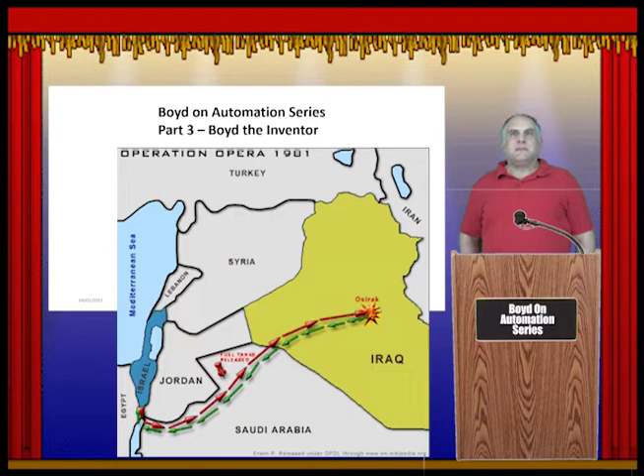The first combat mission of the F-16 was by the Israeli Air Force. It was the only plane in the Israeli Air Force fleet with the range to strike the nuclear plant that Saddam Hussein was building in Iraq. The mission was a success, and Iraq never became a nuclear power.

This certainly helped America's military during both Gulf Wars. The A-10 went on to destroy a majority of the Iraqi tanks in the first Gulf War. The A-10 was the most feared plane by the Iraqis. Not bad for two planes that the generals never wanted.

This presentation is part 3 covering Boyd the Inventor. In Boyd's retirement, he wanted to give further scholarship to air combat. Boyd read a wide variety of books on liberal arts including physics, psychology, anatomy, and philosophy. From his readings and endless conversations with numerous subject matter experts came Boyd's paper called Destruction and Creation and his Patterns of Conflict presentation, where the OODA loop was introduced.

In its simplest form, represented by the picture on the left, is the wheel of observe, orient, decide, and act, or OODA. A more complicated depiction is on the right.

Originally designed for fighter pilots in air combat, Boyd expanded the OODA loop to explain success or failure in most of the major battles in world history. The Blitzkrieg attack of France in 1940 is perhaps a perfect example of OODA applied to armies.

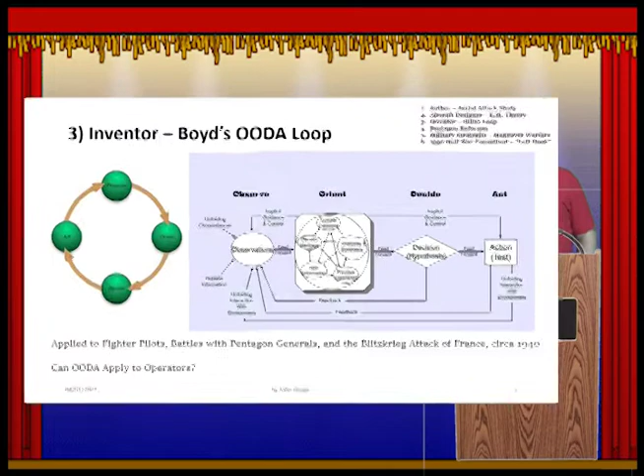Boyd asserts that OODA is essentially the way all humans process their environment. We observe, then orient our observations based on factors such as cultural traditions, previous experience, genetic heritage, and our ability to analyze our observations, then decide on a course of action, and finally act on that decision. We then observe our actions as they impact the environment around us, and the process repeats.

Boyd asserted that the pilot who could run through the OODA cycle fastest would win air combat. In this presentation, we will attempt to answer the question: can OODA apply to process automation in the form of operator performance? Let's investigate OODA a little deeper by defining some terms.

Observe. This is data collection. The worst possible way to observe is to look up values off of graphics and write them down on an operator log sheet. The best possible way to observe is to have the information sorted and prioritized for the operators via the query display, high-performance HMI graphics, alarm management, and trends.

Orient. This is where the observations are analyzed. Training, experience, and aptitude form the basis of the orientation component. A DCS's ability to supply relevant supporting reference information quickly to the operator can also help.

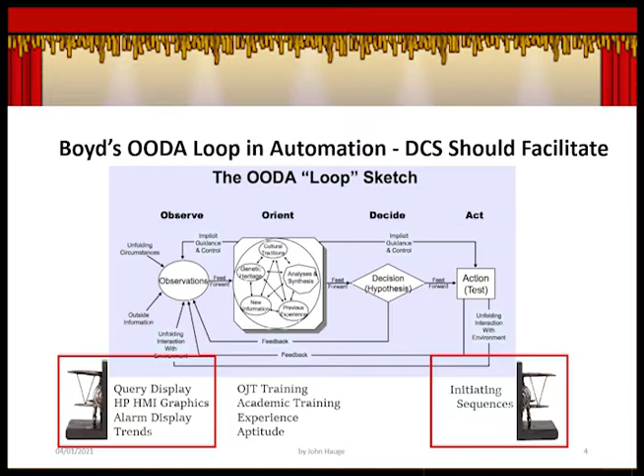The DCS is like bookends of the OODA loop. It should facilitate OODA by providing fast observations and fast actions. The DCS should facilitate an operator's ability to make quick and high-quality decisions and take fast actions.

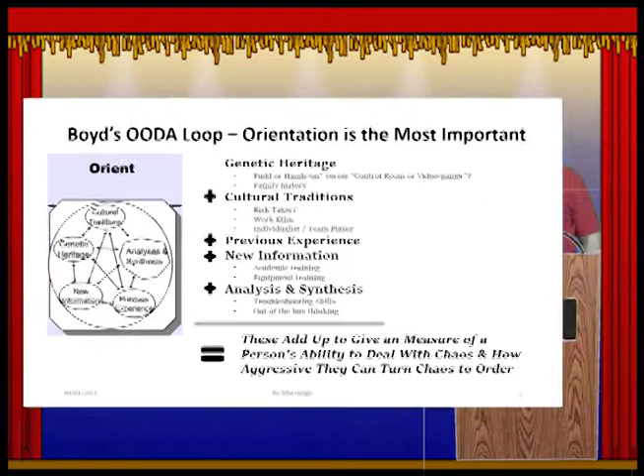Boyd considered orientation as the most important component. Orientation shapes the way a person observes, the way a person decides, and the way a person acts.

Some people prefer to be hands-on rather than work behind a computer screen. Team players may want to collaborate on possible decisions or validate a decision. Some operators may have a personality that make quick decisions come natural. Some operators may have a personality that makes decisions come slower, as they prefer to gather as much information as possible in order to increase their confidence in the final decision. Of these orient factors, training is perhaps the most important method to improve the orientation process.

This would include not just basic information, but also training on various problem-solving methods. Boyd intuitively knew this long before he formalized his OODA ideas. He focused on classroom training while an instructor at Nellis 20 years earlier. It's hard to do justice in 10 minutes to what Boyd could spend 10-some hours explaining after 10 or so years of research.

My impression is that these orient factors can be summed up by one's ability to adapt to chaos and one's aggressiveness in resolving the chaos to return to order. Boyd asserted that in battle, one wants to generate confusion and disorder in the enemy's mind. The enemy's actions will also generate chaos, confusion, and disorder. The aggressive pilot limits the impact of the enemy's actions by quickly countering and staying on offense.

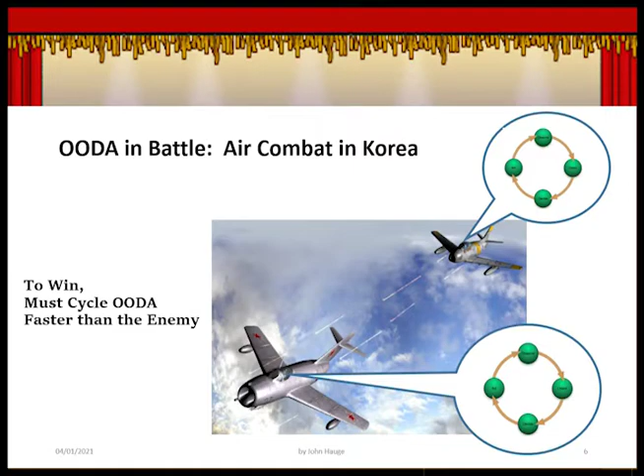To win in air combat, Boyd asserts the pilot must act in a faster tempo than that of the opponent. If successful, the enemy plane will never get an opportunity to fire, and over time will be forced on the defensive. Victory comes when the opponent either gets frustrated and makes a mistake, or starts to panic because they can no longer execute counter moves fast enough.

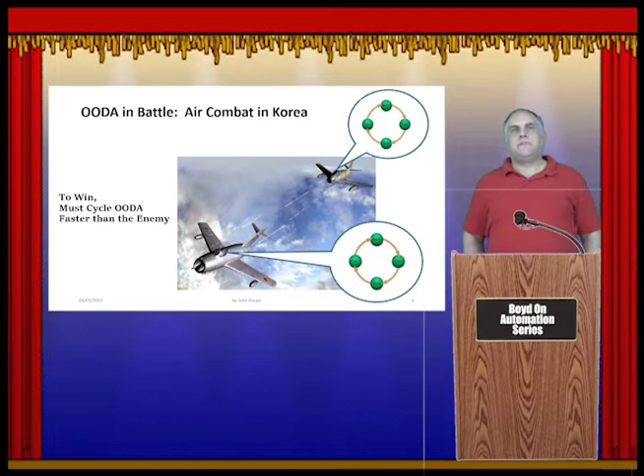In Korea, the F-86 bubble canopy and hydraulic flight controls allowed American pilots to cycle through the OODA loop faster than the MiG pilots. In a dogfight, the F-86 pilot's mind gained order and control with each OODA cycle, while the MiG-15 pilot's mind gained chaos with each OODA cycle, ultimately leading to mental surrender.

In the case of air combat, the fighter pilot wanted to mentally break down the enemy pilot's will to continue to resist. Can an operator mentally break down the equipment they're responsible for? They can't. So OODA should be focused on managing the operator's frustration.

The cause could be process control over moisture. The cause could be poor feed quality. The cause could be the design of the product bin or the speed of the rotary lock. Regardless of the cause, the system is waging war against the operator.

This war is being fought in the mind of the operator - fatigue, frustration. There may have been complaints about the system that were not addressed, which multiplied the frustration. The cleanout procedure could involve extensive lockout-tagout and production downtime. All of this can break down the thought process of the operator and cause them to take shortcuts.

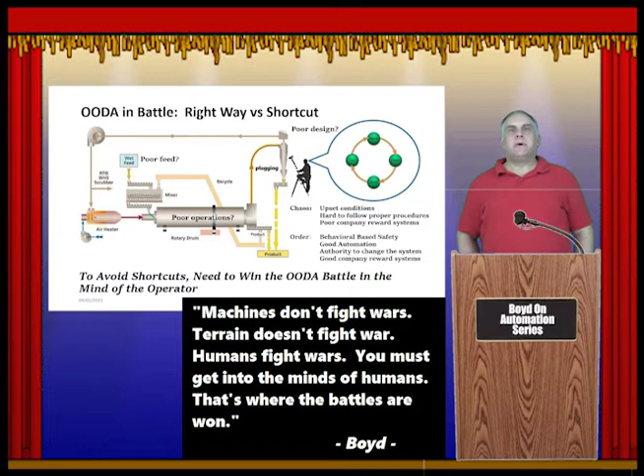One of Boyd's favorite quotes is, 'Machines don't fight wars. Terrain doesn't fight wars. Humans fight wars.' You must get into the minds of humans. That's where the battles are won.

Behavioral-based safety programs follow this. These programs focus on positive reinforcement. The goal is to keep the workforce encouraged and engaged in their battle to be safe. The positive reinforcement prevents frustration and fatigue, two factors that can lead to unsafe shortcuts.

If the equipment went down due to bridging over, was the operator rewarded by being praised for following procedures during cleanout? Or does management not get involved until after an injury?

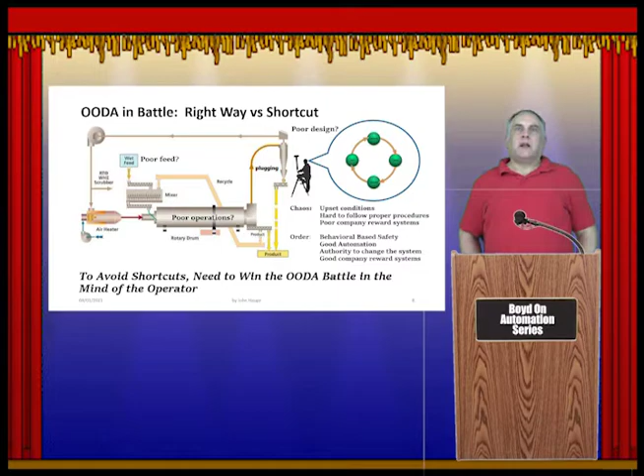The ability for an operator to comply with safety rules or properly control a process is directly related to his or her mental state. The operator must stay in the fight mentally. This means avoiding tunnel vision. This means avoiding rash emotional decisions. This means problem solving, not problem management.

Boyd considered the invasion of France in 1940 as a perfect example of OODA in battle. The German army, under General Heinz Guderian, the father of Blitzkrieg, moved so fast to the English Channel that the French army could not countermove fast enough. Eventually, the French political leaders got discouraged and surrendered.

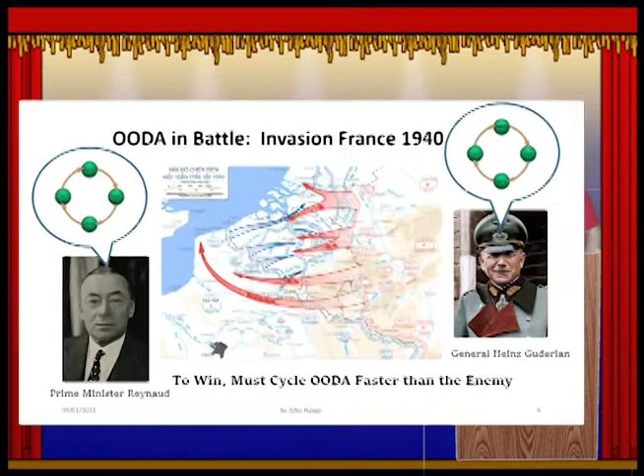The French army was numerically superior to the German army. German General Manstein wrote in his memoirs that there was nothing in the invasion battle plan that anticipated a German victory over France. Yet, the French army was defeated. The French army was not defeated in battle, though. The leaders of the French army were mentally defeated. The French political leaders, like Prime Minister Reynaud, lost their will to continue to fight and surrendered.

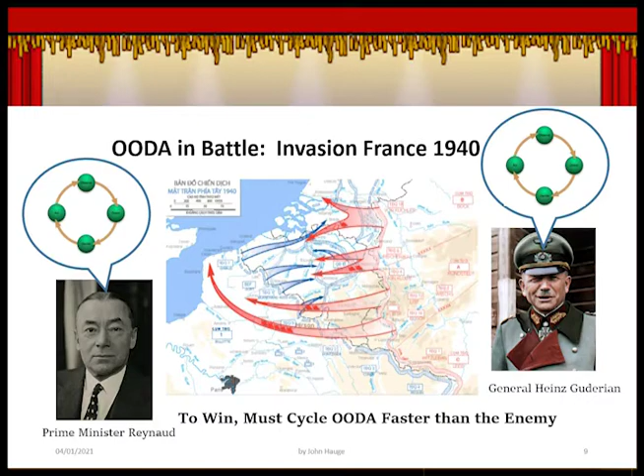Since the operator can't break down the mental processes of the DCS, think about how the DCS can attack the mental processes of the operator. One example is when the DCS lies to the operator. Let's look at a common situation of a valve stuck open, but its indication showed closed. How well is this failure situation processed through the OODA cycle? Quick OODA?

Automation triggers a reaction and sends a message to the query display to inform the operator. At 3 Mile Island, backup pumps automatically started to correct the cooling water problem, but were rendered useless due to closed manual valves. Automation did not anticipate this problem, so no quick OODA.

Automated systems should be fully automated to avoid operators from having to slow down OODA in a crisis to throw hand valves.

Medium OODA. An audible alarm is triggered to alert the operator that action is needed to investigate an I/O failure. For 3 Mile Island, there were other I/O points that could have alarmed to help identify the loss of cooling water, but alarms were not configured. HAZOP did not anticipate this problem, so no medium OODA.

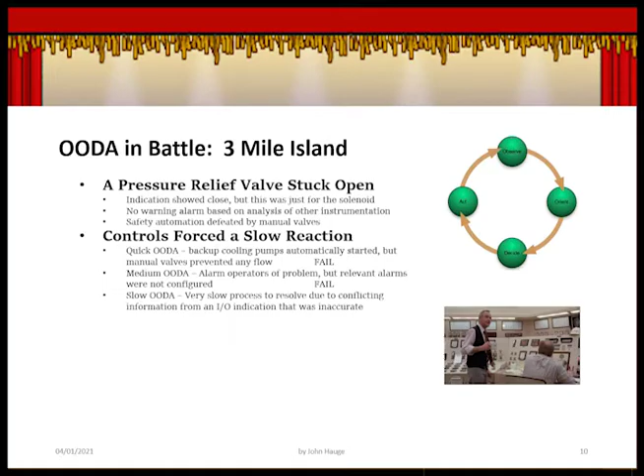The OODA loop can be applied to commercial airline pilots. In 1972, Eastern Airlines Flight 401 crashed into the Florida Everglades. Maybe I should begin with, who has seen the movie The Ghost of Flight 401? This incident became a Hollywood movie starring Ernest Borgnine.

In any case, the pilots were so focused on a broken landing gear down confirmation light that they lost track of the external environment. Their OODA loop stopped while they were trying to figure out if it was a real problem or an instrumentation problem, i.e. the computer lying to them. The pilots stopped observing. They had tunnel vision.

Ask yourselves, has an operator ever had tunnel vision? Have you ever had tunnel vision?

Sometimes the best help a supervisor can give on a job is to observe the environment and look for signs of tunnel vision. Sometimes the worst help a supervisor can give is to roll up sleeves and pitch in.

An operator can get so preoccupied with the first couple of alarms in an alarm flood situation that they stop the observe process while they try to resolve those first couple of alarms. A stalled OODA can cause the operator to overlook additional alarms that may be more important. Certainly, observing the altitude of a plane is more important than a landing gear down confirmation light.

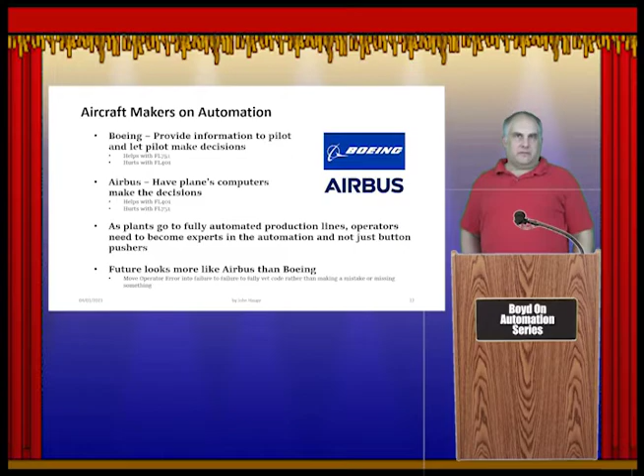Airbus is moving operator error from making mistakes or missing something into a failure to fully vet the automation. A Top Gun trained operator would be the best choice to vet all new automation code.

Here are some other ideas to improve OODA. The DCS should have the following: gate alarms by operator, not by control room. Any alarm just for one operator is a nuisance for all of the others in the control room.

Full use of the query display. This facilitates the air traffic controller transition for operators. This has been advocated before, but it is improved OODA performance that is the real driver for it.

Eliminate reading sheets. Manually writing numbers onto a reading sheet slows down OODA. Automation should be installed to react to any bad values, thus making reading sheets obsolete.

Electronic log sheets for operator notes. Searchable and shareable notes, rather than paper logbooks, speed up OODA by quickly allowing new information to enter the Orient section of OODA to better inform the coming decision.

SOPs launched by graphics. Storing operator SOPs in some IT database or large binder slows down OODA. A single push button from a high-performance HMI graphic is better. Like with electronic log sheets, quick access to information speeds up the Orient section of OODA.

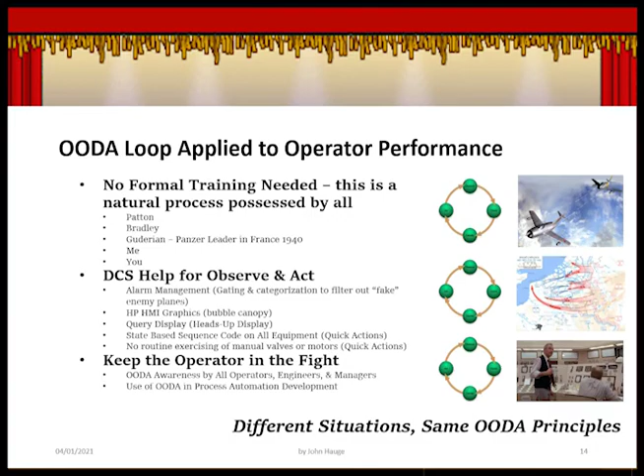Boyd's OODA loop provides a common thread to tie in alarm management, high-performance HMI, and full use of state-based automation for all equipment, and explain how they improve operator performance.

The 21st century manufacturing plant must incorporate OODA not just into process automation and operator training, but operations management and engineers as well. A DCS is only as good as its ability to minimize chaos, which ultimately keeps the operator's mind in the fight. This concludes part 3 of the Boyd on Automation series.

In part 4, we will learn about Boyd the Reformer and Boyd the Strategist, and how his ideas can be applied to process automation, and in particular DCS selection and obsolete I/O strategy.